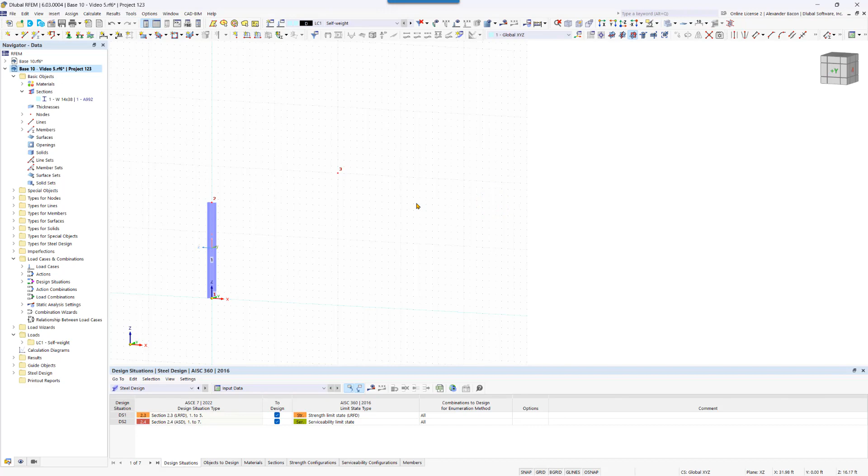Next, we want to create the left roof beam with the taper on the left at the member start. To do this, we click on the new single member button. Now we're going to come across one of the new innovations of RFEM 6. In defining the member properties, it is also possible to create a taper or an offset at one or both ends at the same time.

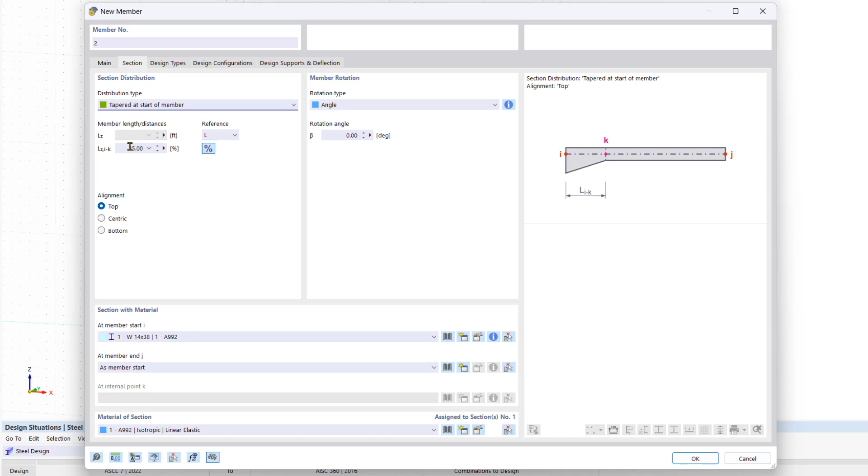So let's go to the section tab. And then under distribution type, we're going to select the option tapered at start of member. And now we can also enter in the length of the taper in feet or as a percentage. Below, we also change the alignment by selecting the top option.

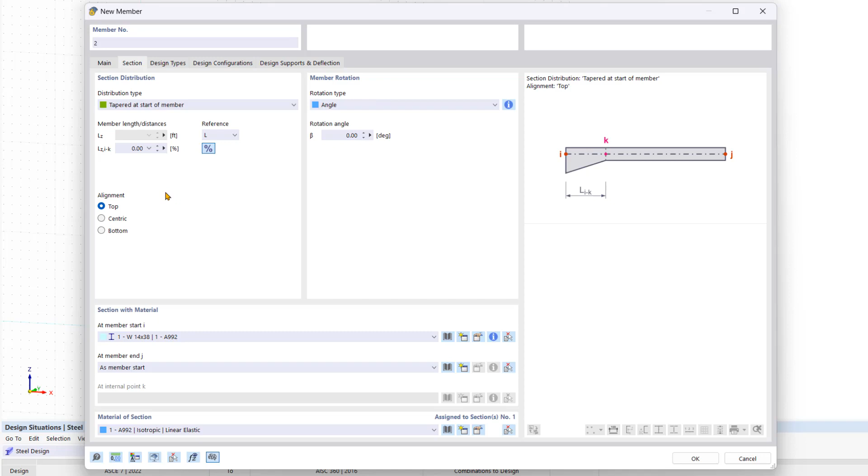In the section with material area, we will now define the respective sections for the member start and the rest of the member. We click on the Import from Section Library icon, and in the new dialog box, we click on Parametric I-Sections to become familiar with the parametric sections. In the new window, you can find the already created sections in the list on the left, such as the W14x38, which is our columns.

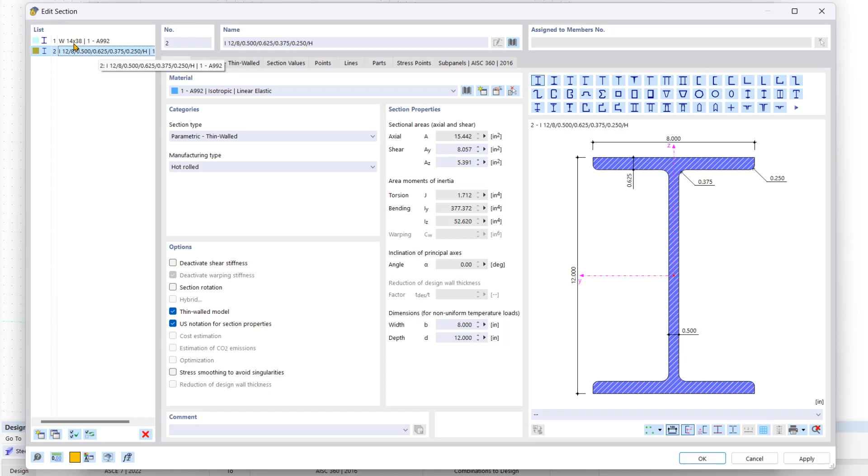The second entry in the list has been created automatically by RFEM as a placeholder. We will now adjust it to our specifications under the Parametric Thin-Walled tab. Here we can either enter the desired parameters of the geometry manually or import them from an existing standardized section. So let's click on the Import Parameters from Standardized Section icon.

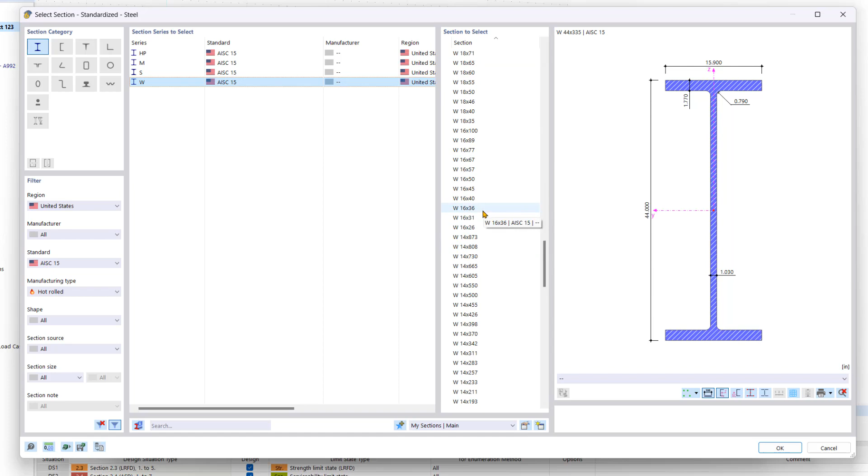And look for a W shape 16x36. We confirm the entry by clicking OK. Now the geometry of the standardized section has been adopted, and we can change it as desired.

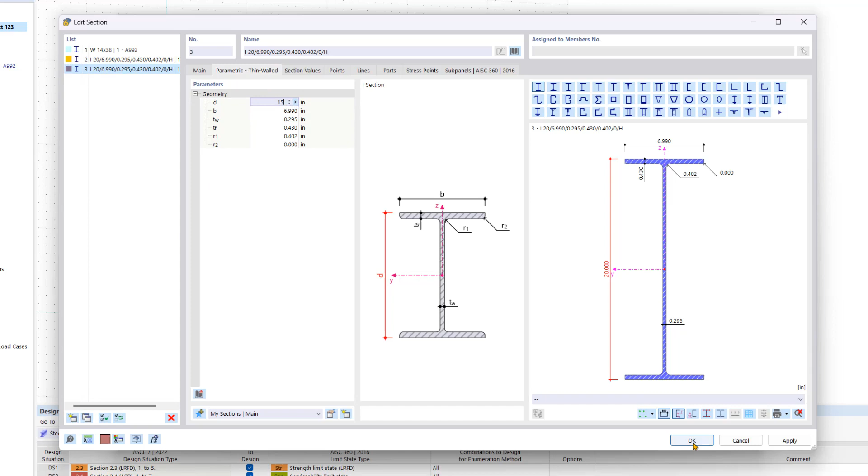When we are finished with the taper's geometry, we can copy this section in the list on the left using the respective symbol to define the section for the rest of the members. For the copied section, we want to adjust the height accordingly and confirm the entry by clicking OK. Thus, we have defined the two new sections that we have to assign to the member start and the member end. The bitmap on the right of the window shows the entire member. We confirm the created roof beam by clicking OK.

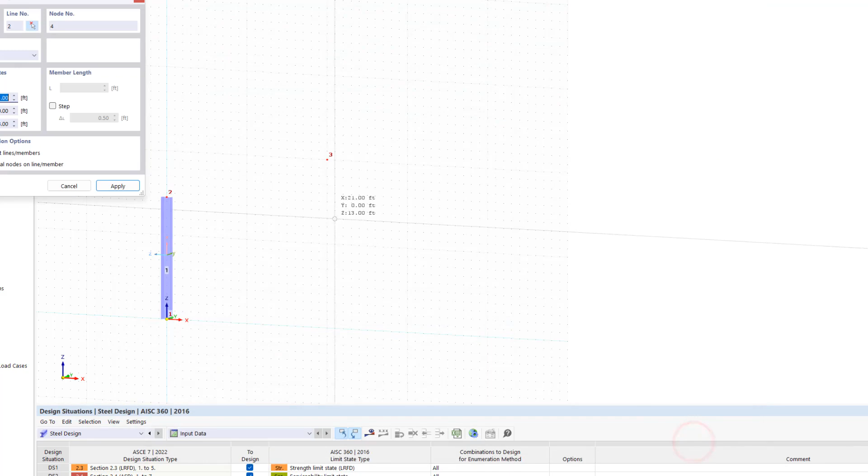And insert it by first clicking on the column end and then the previously created node. The order is very important because the taper is defined at the member start. We exit the input by right-clicking, and since we are modeling a 3D hall, it must be sufficiently stiffened to be able to insert bracings and purlins more efficiently.

So during this tutorial series, we will add internal nodes to the two members. We have several options for this. We can decide to simply divide the members into intermediate nodes by right-clicking. We activate the Node on Member option so that nodes are created on the members without dividing them.

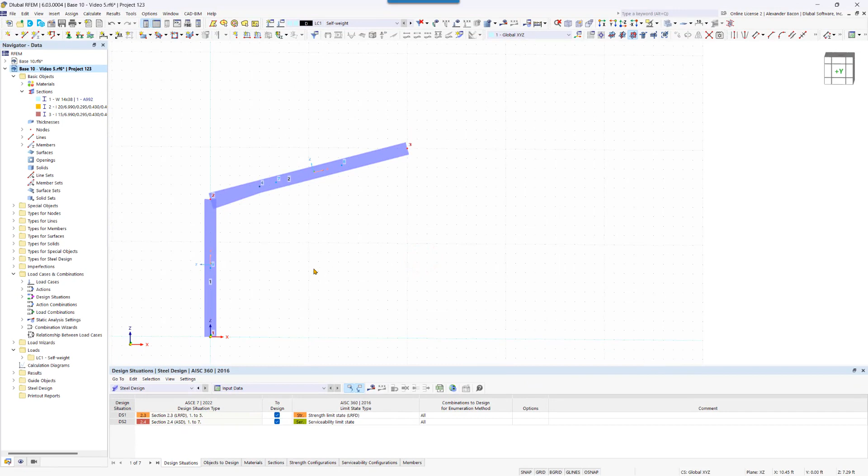Now we would like to complete the 2D frame. To do this, we do not have to go through all the steps again, and we can just mirror half of the frame to the other side. So first we select the entire model and click on the mirror icon at the top. In the new dialog box, we activate the Create Copy option so that half of the frame is copied.

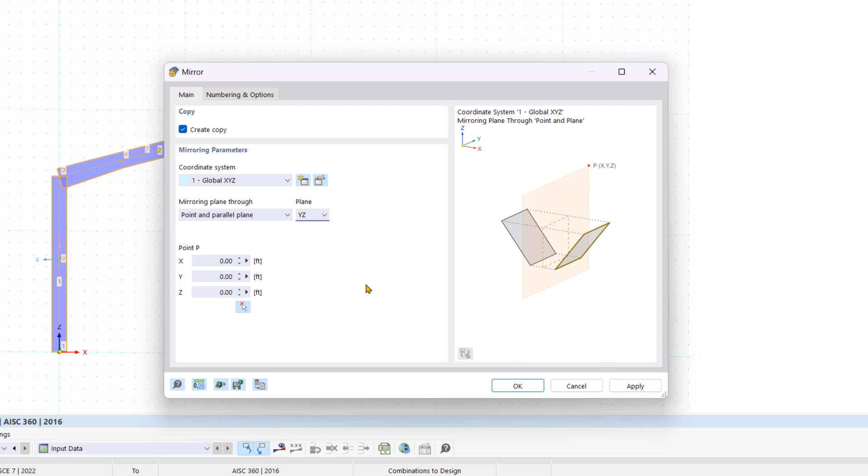In the mirroring parameters area, we leave the coordinate system at the default setting and select the desired mirroring plane. Afterwards, we have to enter the coordinates of the mirroring point, or click on the point on the structural model using the respective symbol. We click OK to perform the mirroring.

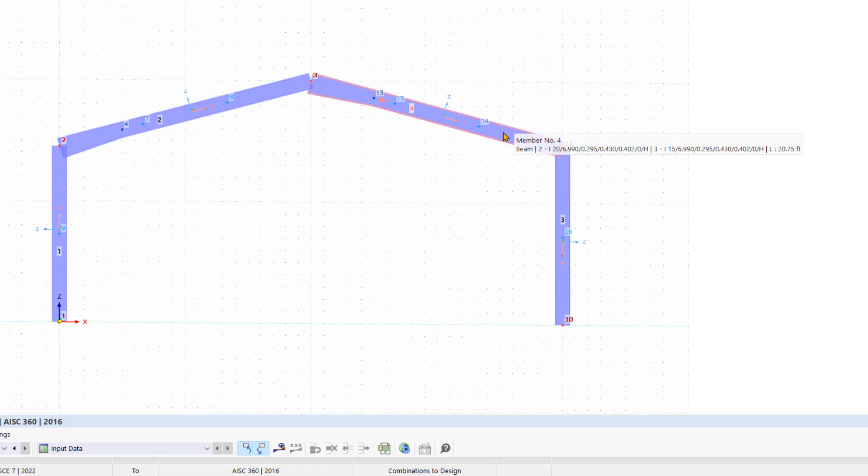Now we also need to reverse the top right roof beam so the orientation is correct. We can do this by right-clicking on the beam and clicking Reverse Member Orientation. The first 2D frame has now been inserted, and in the next video we will continue the modeling.